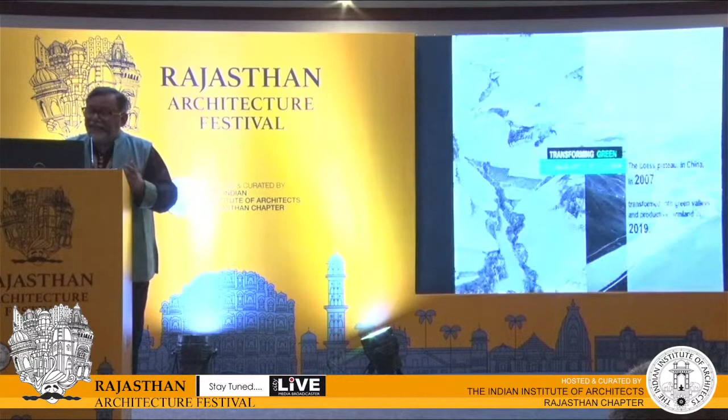This is an example from China, the Loess plateau. The image on the left is from 2007, and the image on the right, with the green and the river, is from 2019. So basically, these are a few attempts that architects are trying to add green, or come up with green architecture or green landscape, with the help of innovation and technology.

But when you talk about deserts, when you talk about the landscape like you have in Rajasthan, we really need to understand the ecology of sand and do the appropriate architecture.

This is again another attempt by architect Jean Nouvel in the National Museum of Qatar, where he tried to be inspired by the desert rose that inspired the formation of this museum.

This is again another inspiration from the sand in Saudi Arabia. X-Architects, a local company, came up with a proposal in 2019 for a resort inspired by the sand dunes and the landscape of the sand.

Again, don't get me wrong, I'm not trying to market these architectures. They are not yet tested if they are the right solution for the desert. All I'm trying to say is that there are many attempts all over the globe using innovation and technology. But what I think is most important is to try to understand again and again the ecology of the sand, and get the lessons from the ancestral wisdom.

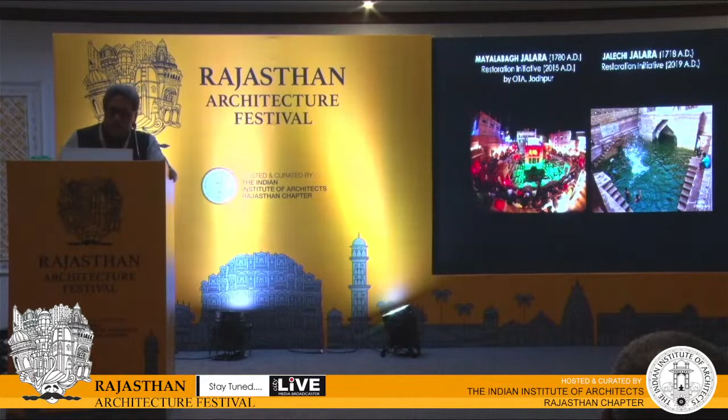Finally, I'll come to this - because just redoing and regenerating these water bodies is not enough, since our cities have grown and population has grown. So what we have to learn is that we have to start that work in progress again.

We have to start adding more and more water bodies in our city, in the colonial colonies, in the new neighborhoods that have come up now. And towards this, one experiment we've done has been very successful.

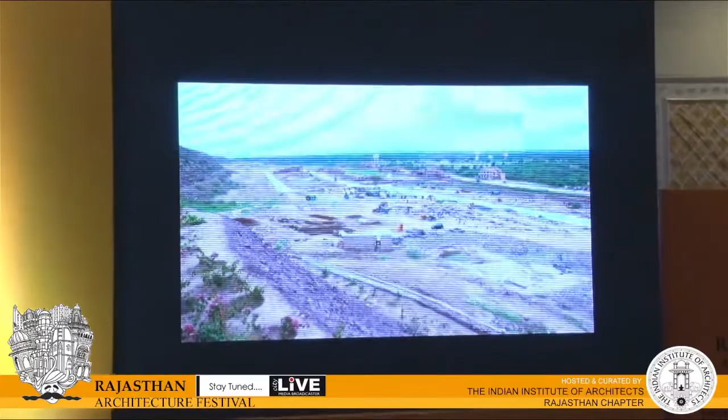This is the picture of the land when we acquired it - absolutely barren, no trees, no water body. In fact, water would come on the other side. There were water bodies nearby, but not over here.

To have a very good township, you definitely needed green. But the state doesn't have enough water to give, and there isn't enough underground water either, because we've touched 300, 400 feet now and that water is too brackish. So we thought we'd resort to ancient wisdom and try to create what our ancestors did.

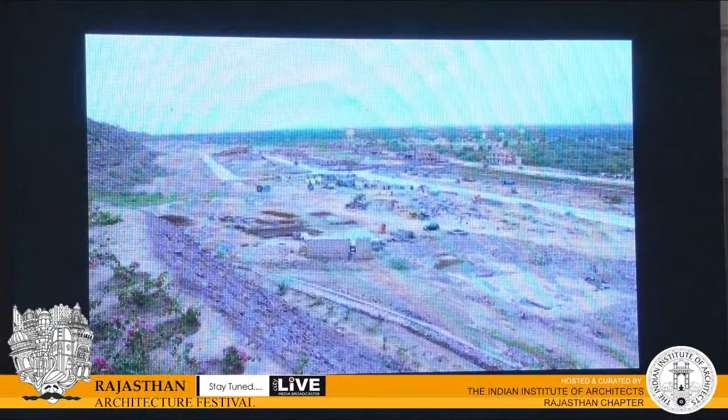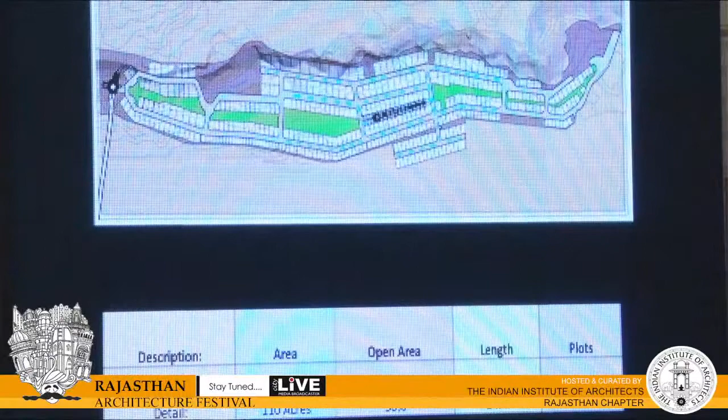So this is what we selected, and we created this. This master plan was done by Mr. U.C. Jain, and we've built this Bawri here. It has a very unique structural system.

We did not use RCC at all, and we did not use steel. We've just used stone. These traditional vaults, we have upended them, keeping two walls against each other to counterbalance their strength and the pressure that earth would apply. The walls are very simple, and the thickness even at the bottommost portion, 60 feet from the ground, is just 0.7 meters. Otherwise, conventional stone walls would be 7 feet wide, like a dam, like a structure.

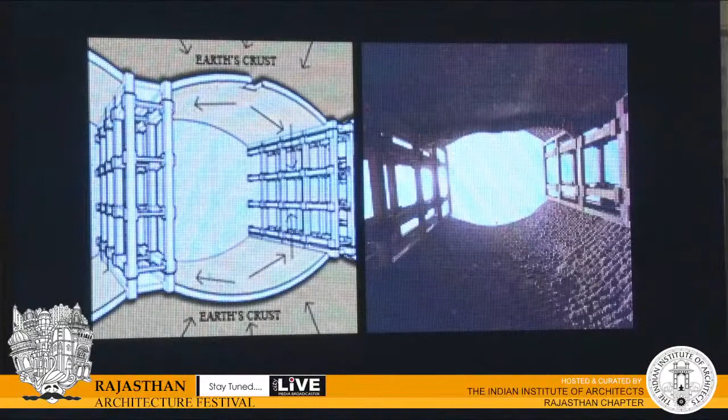The module that we developed, we conjoined about 14 such modules, and this is almost about 235 meters long, going about 18 meters below earth. The water depth would be about 11 meters when at its fullest, and we managed to collect about 17.5 million liters of rainwater in this.

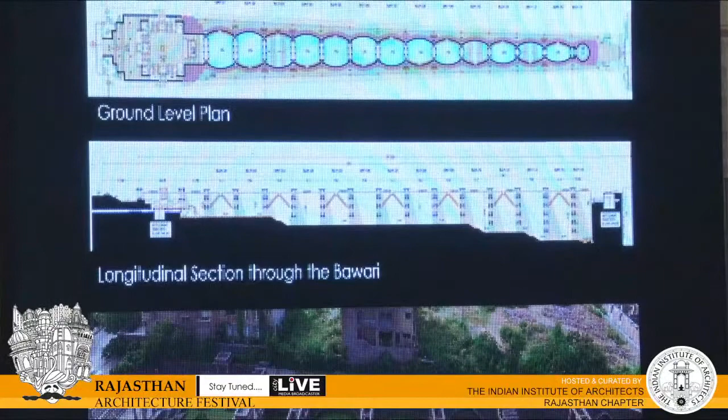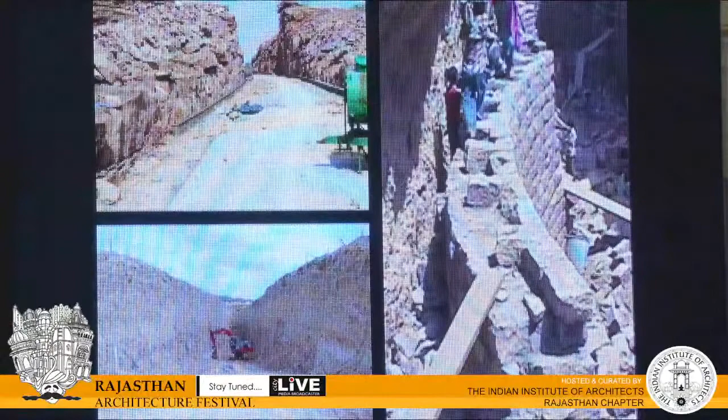In doing this Bawri, what we have used is the overburden of the hillock. When we were doing roads over there, we removed this stone. Throwing the stone out would have cost us, and it would have cost a lot of carbon footprint also. So we used the stone in making these arcuated walls. All the scrap that came out of making the stone, we've used in concrete, infills, backfills and heartings. The excavated earth we have used in filling the land where there were undulations. So we kind of achieved a geological balance.

These are people who are picking up stone. This is a very, very special skill. The skill is dying, these people are becoming extinct because we have a lot of cranes and mechanical ways of lifting stone. But we made sure that somehow we managed to keep the skill alive, and we've used these people, they are called chavaliyas. This is the kind of thing, an entirely subterranean structure that we have.

I'll quickly give you a tour through that. This is a small veranda through which you enter. And this is a combination of a step pond and Bawri. I mean, it's not just a well, it's a combination of two. So this is the kind of grand receiving area.

The two-storied pavilion marks the entrance to the main Bawri, which is about 750 feet long. You take one round and you will have done a quarter of a kilometer. These are the trabeated frames which you would find in old Bawris where you go to Gujarat and in western Rajasthan. And the binocular view that these are offering, you can see there are inlets on the other side, 735 feet, 235 meters at the other end.

And these are the pavilions that you can liken to the pavilions that we have seen in other Bawris, where social interaction would take place. So basically, these are the trabeated frames which are holding the arcuated walls. On top of that, we have created two pavilions where people can go and sit.

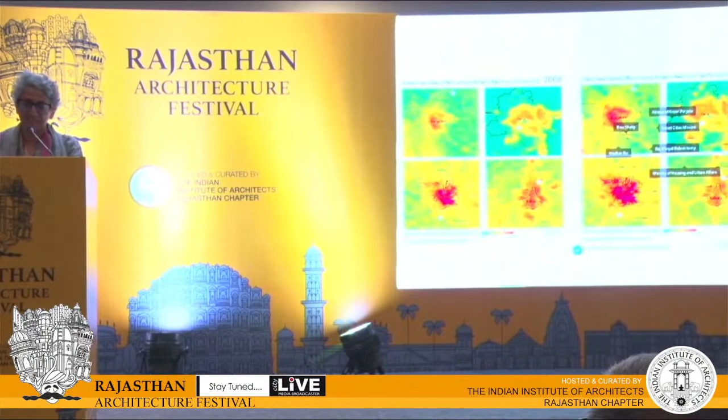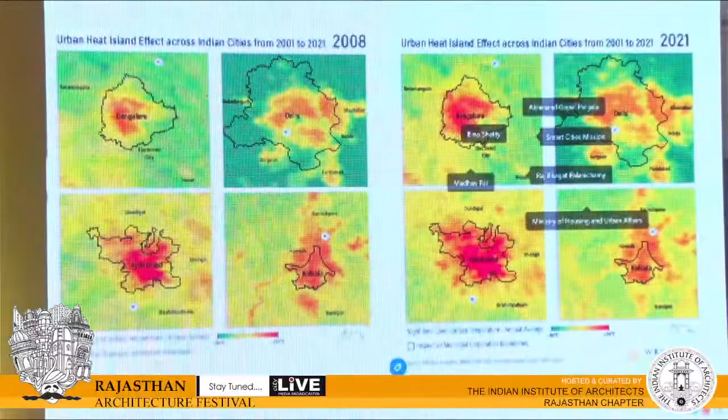This is a screenshot I took of the study by WRI on heat island effect in four cities. So you can see 2008 and what's happening in 2021, including Bangalore, which we say, oh, it's very pleasant, but still, the thing is growing. So, I'm saying, what do we do?

Could we start looking at a new narrative? Could we start looking at something different? Yes, it was a new narrative when they decided to build Jaipur. There was nothing to fall back upon. It's a new narrative. Architect Mridul showed us. It is something more we could do in this era of Anthropocene.

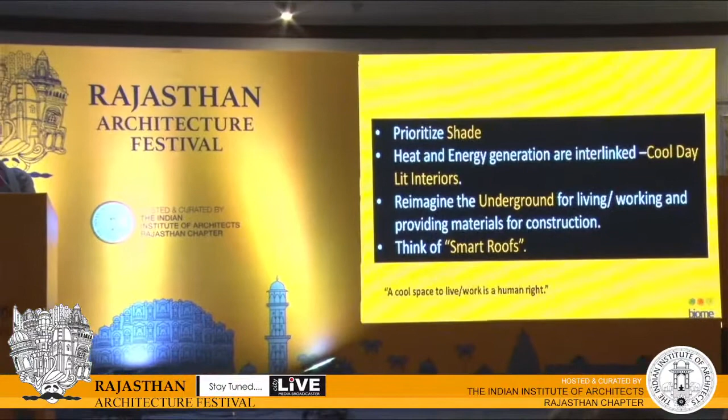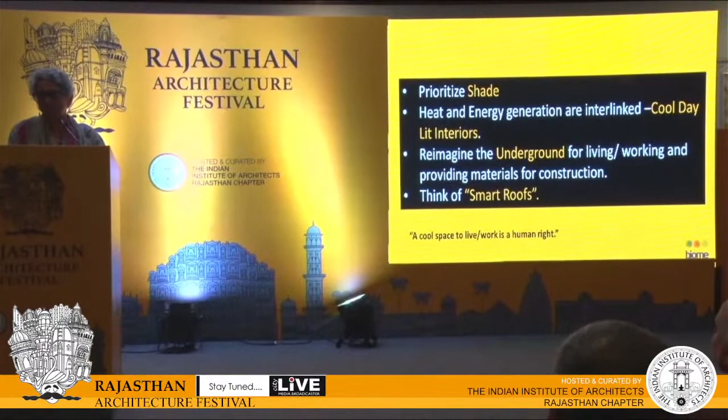And first, we start with the fine print. We demand that we need cool spaces to live and work as a human right. So we prioritize shade. Unfortunately, we don't have time to grow trees, so let's not cut them. But also let's think of building differently and using spaces differently.

So getting back to this, this is a study from Netherlands where they're looking at new towns and how do you design with ecosystem in mind? How do you design with sun in mind? So they design with the sun path. So here studies show how sun can reach to the lowest level at different times of the day, and how do you decide on what height the building should be?

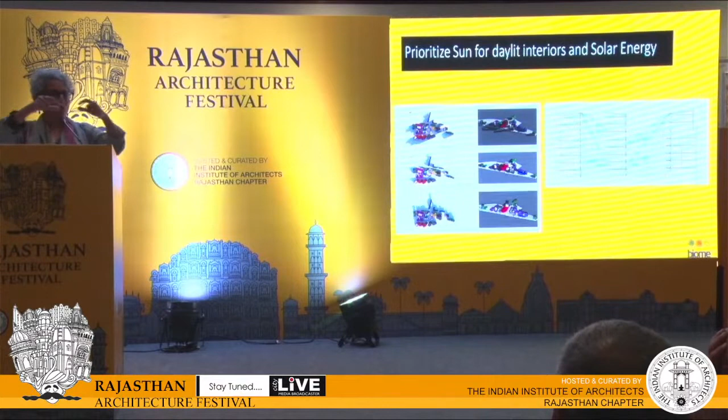Not based on bylaws, not based on width of the road, and then you can decide on what height or what setbacks you leave and what height you do. And then I will put a solar system on my terrace, but my neighbor would put a 20-floor high building and my solar system is totally gone. No, you have to decide this whole thing not only with just one building, but how do buildings talk to each other? And get the daylight inside.

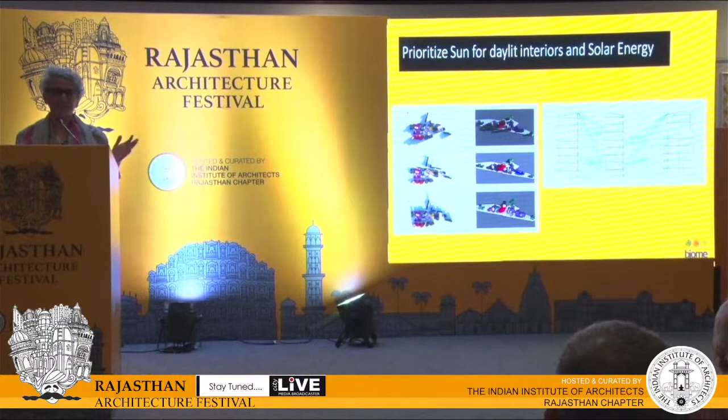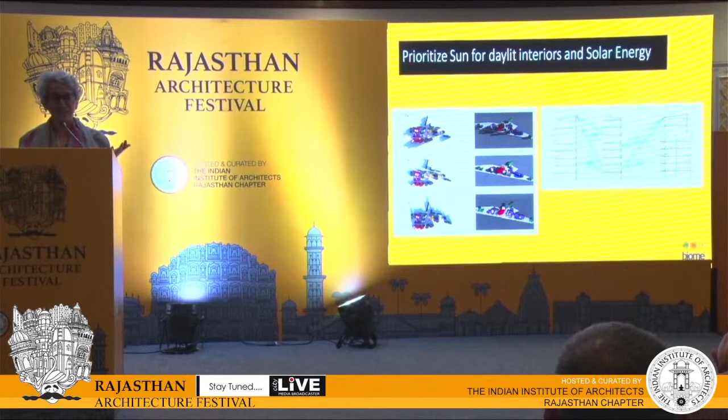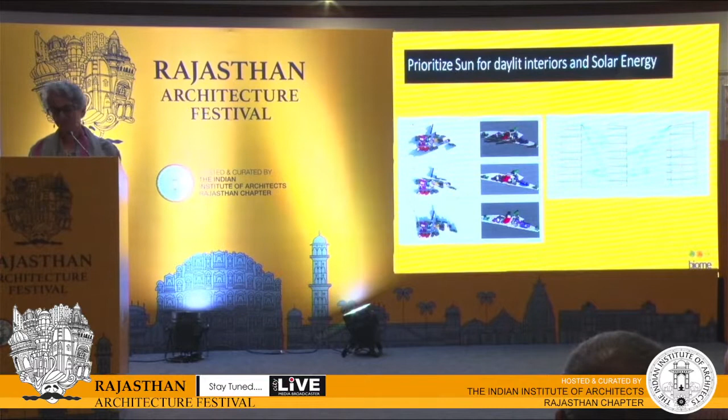We love our old buildings, which just say they're so good, they're great, but we're using for different purposes. If we're using the buildings for offices, for institutions, for classrooms, we need daylight inside. And one of the reasons why we use glass is for that purpose. And so let's not demonize glass, but let's understand how the two can marry. And how do you now decide on various different buildings coming next to you?

So I come with, is it possible to think of the underground? There are lots of buildings which you could do. Yesterday, Chan and I went into a building here in Jaipur, and they had a lovely underground. He said he also had a well, but now it's all dry. There is dirt inside, and it can't be used, but there is an underground.

Helsinki completed a master plan in 2019, covering 214 square kilometers, combining energy conservation, shelter from its long cold winters, and also a bunker in case of Russian aggression. I think they were forthright, no? They really thought ahead.

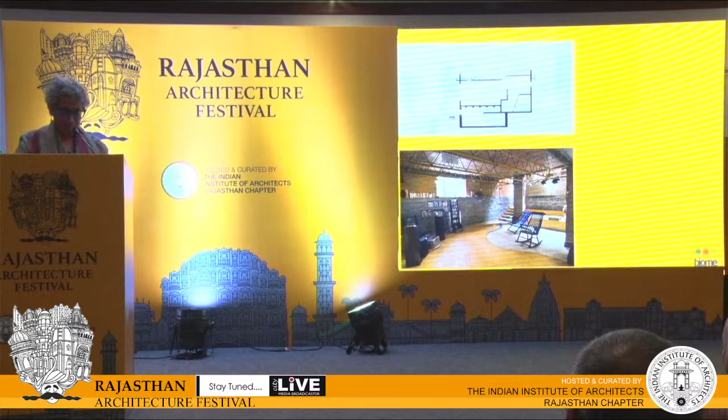And now the basements are becoming better and sexier, so you have skylights. The fact is that we keep getting greedy about making basements, so we have gardens and wells in the basement. But also, why are we greedy? Because we noticed that the earth we remove from one basement is enough to build three more homes.

So Mridul, I was just greatly thrilled that you used the stone and the soil and just reused it, and your phrase of geological, net zero geologically.

So here, this was a house we made with a large basement and a garden and a well, so we got a lot of earth, and luckily it was in the outskirts, so we kept making the blocks just for some rainy day. That meant when we had to do a school later where we couldn't have a basement, and we had to do it very fast, so we made blocks for it and took it there.

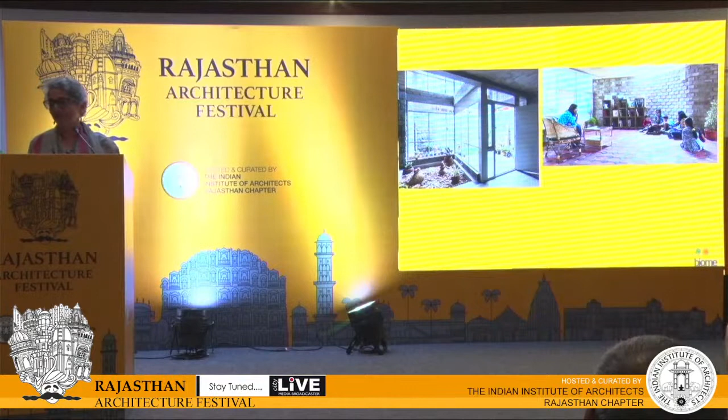And this is the study which tells us, yes, we get three times the amount of soil we would get.

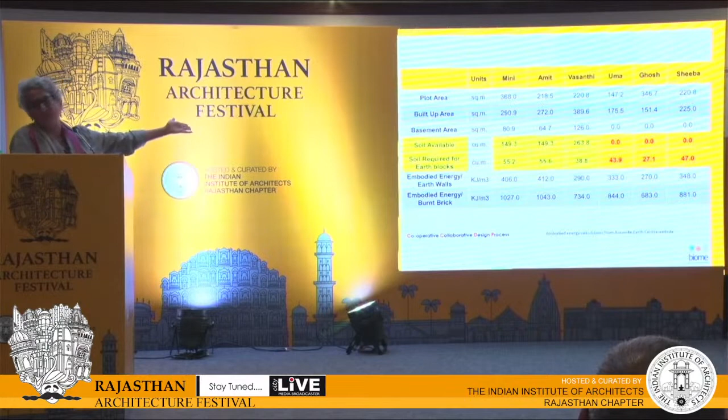Mini has a basement of 150 cubic meters, but uses only 55, and Uma could use that for her house. So what we call is a collaborative, cooperative process, and from that, the city becomes the supplier of your materials. You don't have to go out of the city for that.

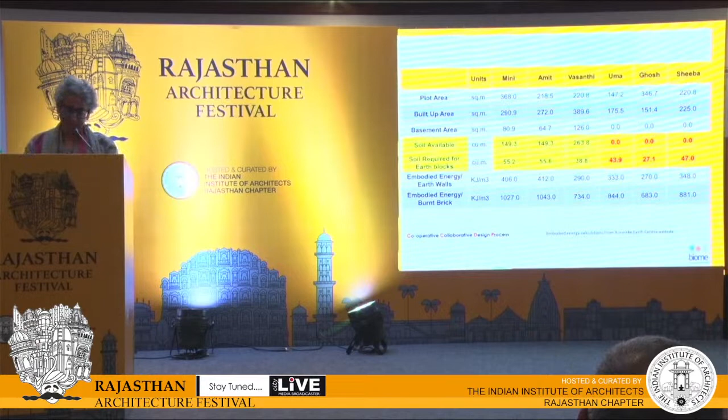Then this I call the mother of all undergrounds. This is a school in Coimbatore in South India, which not only has the classrooms in the basement - though basement is not allowed by bylaws, so you make the play fields also a basement. So now it's not a basement because you can come out.

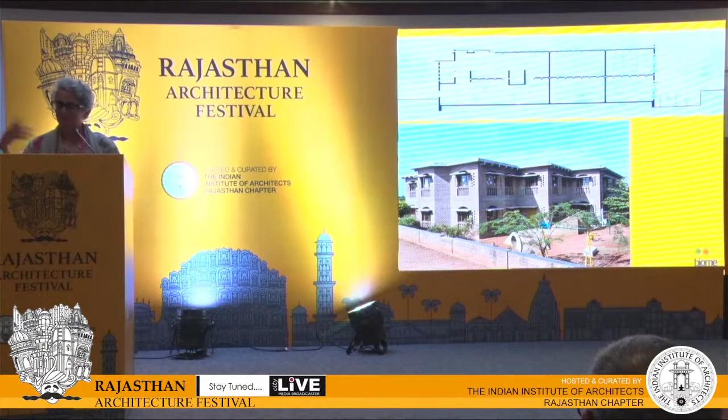Why did that happen? We got a metro station, Shivaji Stadium metro station, a very big place - you have to go there to get your visa. And it dried up this water body. So how do we talk to each other? How do cities not depend on some obsolete bylaws?

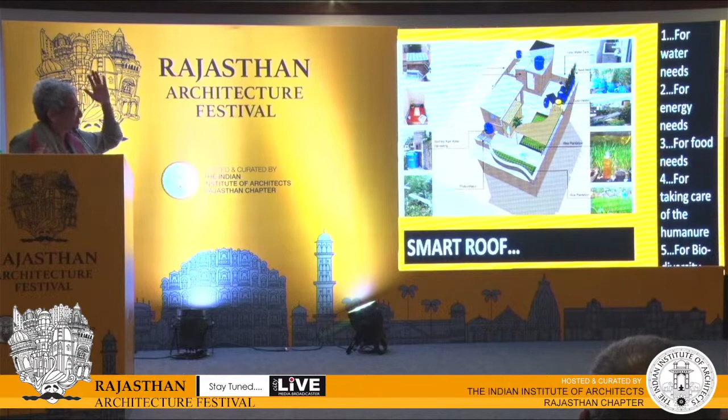So let's change the narrative, and change it in many ways. Think of your terraces as something smart. Think of your terraces which would give you water for drinking and cooking. We have the cleanest water, which would provide for your energy needs.

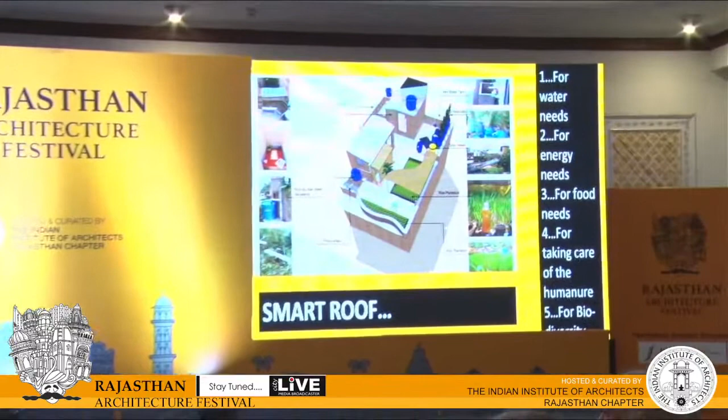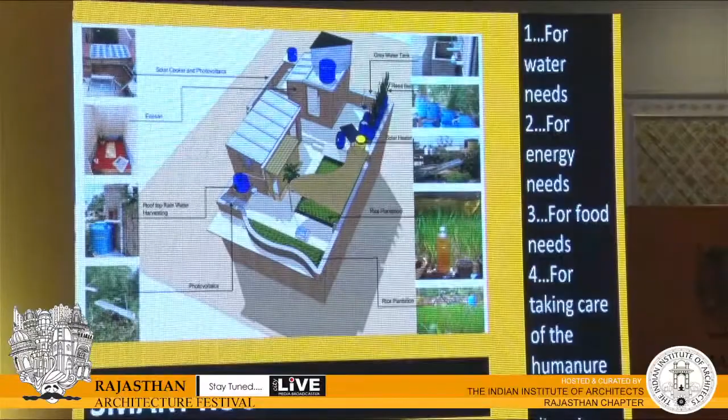And that's why, again, think of the various heights, how you will put it. You can grow food - we grow rice on our terrace and take care of human manure. You're all walking fertilizer factories, all of you. So use that to grow your food, make soil, which is something which is not available.

And with that, we would get to be building with carrying capacity. India says that 400 people in 1 square kilometer is the density required in an urban area. We've done studies, and we say that to get water, energy, food, taking care of human manure and sanitation, and for biodiversity, you need about 40 square meters per person.

This is in Bangalore. Use it for your city separately.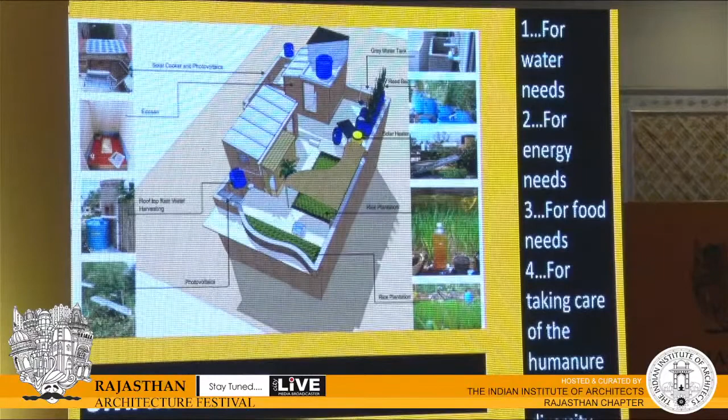I could give a different presentation sometime where I could give you numbers. So you still have 2,460 square meters per person for schools, roads, public spaces, and planting trees. Thank you. More of it, you could see it on our website, and if possible, read the Biome diaries.

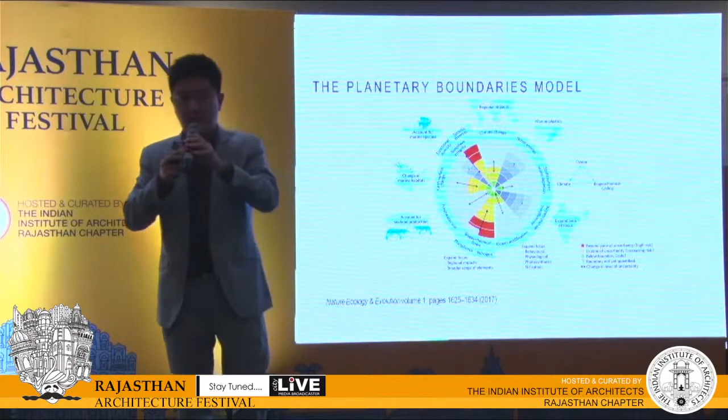Well, the resolution isn't great, to be honest, but if you look up the planetary boundaries model, it's all out there on Google image search. This was done by the good folk at the Stockholm Institute, and it talks about 9 different sectors in which we're facing some risk. So biodiversity is some of them, marine species and so on.

So carbon is just 1 out of 9, to be honest. Of course it's significant, but it's not the only one. So we need to think about how we can live in a just and equitable circle. This inner circle is a social foundation beneath which it is no longer viable to live, because you don't have your regular basic creature comforts. And on the outer ring is an ecological ceiling beyond which it becomes untenable for the planet, because you're stressing it too much.

What we do in the Singapore Institute of Architects, in the Sustainability Committee, is find ways in which architects, and I imagine most of us in this room are architects, have agency in fulfilling the goals of the SDGs, the Sustainable Development Goals. We call them the Environmental Design Guidelines, and there are 7 of them, each with different modes of agency in what we do with building.

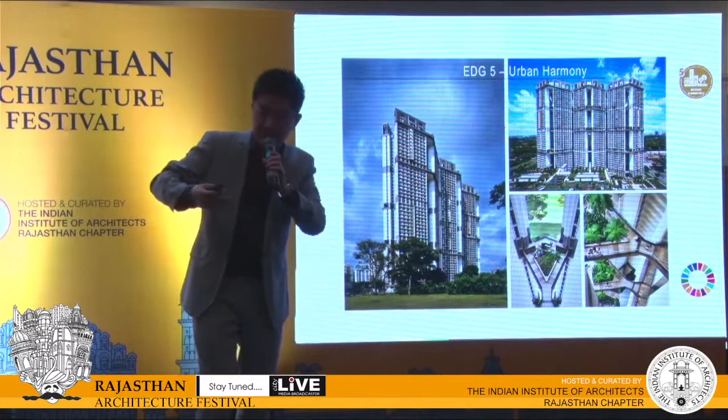I think the stack effect was mentioned in some of the talks yesterday, by the Iranian architect who spoke. Some of these do show up in modern architecture as well.

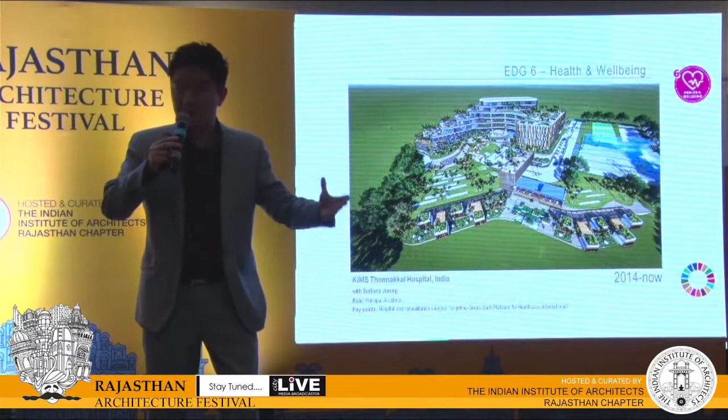Health and well-being, here's a proposal for a hospital in India, coincidentally in Trivandrum. The idea was for each ward to have access to visual greens. The moment you have access to visual greens, if you subscribe to the biophilia mode of thinking, you could psychologically be healed, but at the same time there are environmental benefits that greening allows.

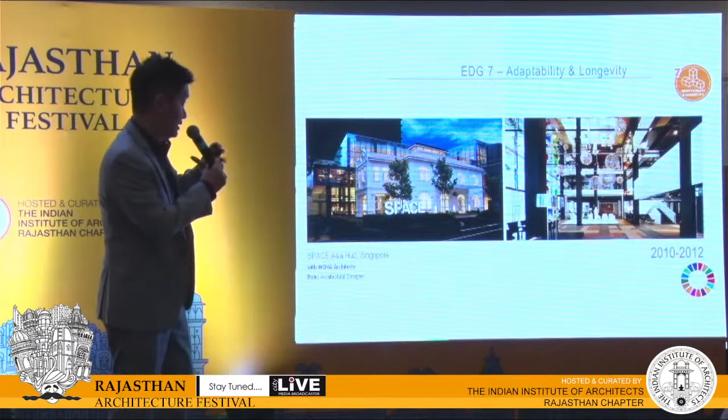Adaptability - left and right, you've got 2 old colonial buildings, not too old compared to India, but old in the Singapore context. In the middle is this new building, made of glass, which bridges both the old and the new, creating a contiguous furniture gallery for a leading furniture brand in Asia Pacific. In the middle you find large volumes connecting these 2 existing structures, so it guts out, but at the same time it connects.

Also, an office building that's built on top of an existing factory or warehousing building.

So that takes it from 10 stories to 12 stories with the exact same structure, therefore saving costs in terms of new construction. And as an amalgamation of these 7 EDGs, I've only shown you 4 earlier, but there are 7.

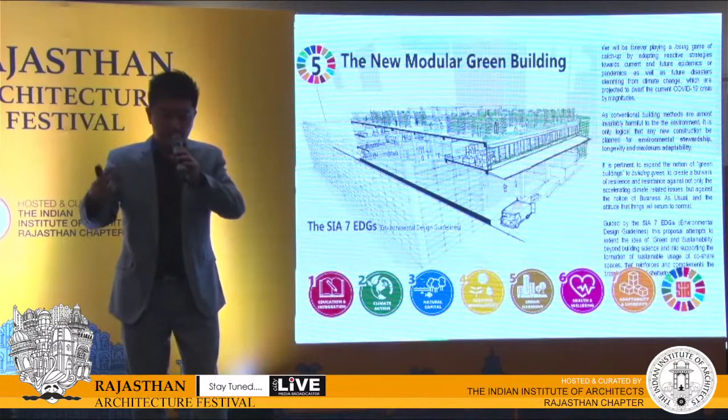During the pandemic, we thought about the possibilities of coming up with a new modular green building typology. We made reference from the old Diwan, the old forum, and the naturally ventilated halls, and adapted that into a new modular building that could be adapted into various things. Food resiliency on top with urban farms, different ward facilities, and access to satellite hospitals.

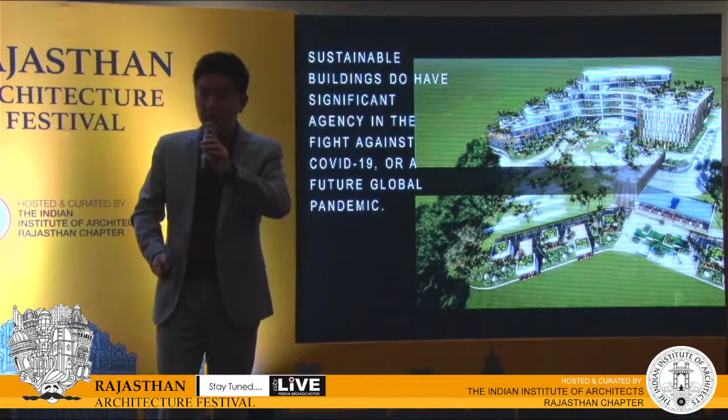So sustainable buildings do have significant agency in the fight against any global pandemic in the future. We do have a lot to go, to be honest.

Architects have an agency not just in design, but in the way you shape people's lives, how they live, who they vote for even. And ultimately, you also have a role in presenting professional thoughts to your government leaders and pushing for sustainable environments. Singapore is 700 square kilometers.

So in its land use and zoning, basically, we've got it down to a T. It's like a giant Sudoku puzzle. Everything has a plot ratio. Every single inch of land, because it's so small, has been planned down to the last square inch.

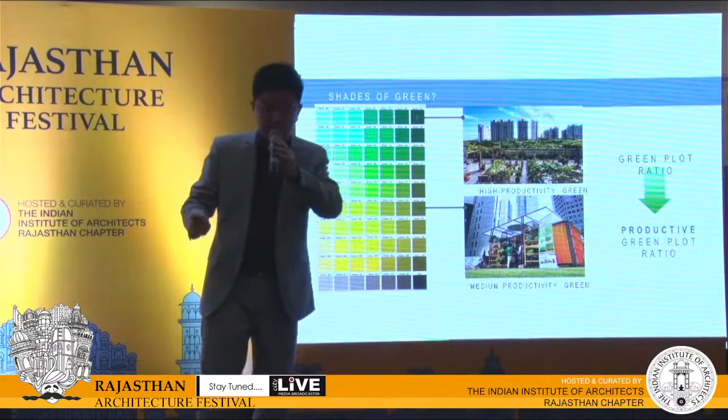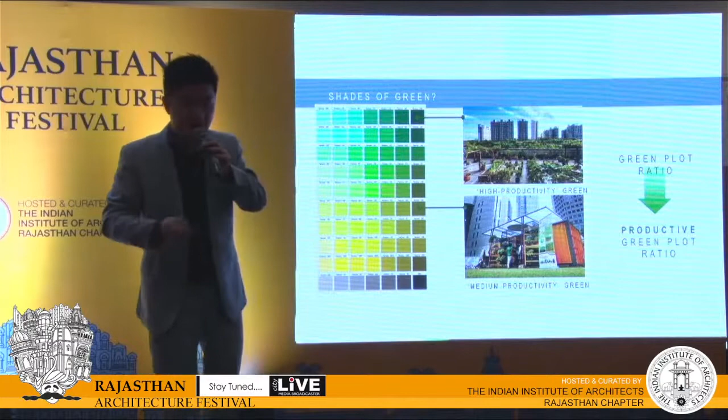To be honest, these are actually Melvin's discussions that we had with the Urban Redevelopment Authority. We talked about different shades, different intensities of green - green that's for leisure, green that's for productive use. You could plant horticulture on it, you could have buildings with integrated green, and that lends you different shades of green and possibly different shades of blue.

Just some examples of how these projects can actually add different shades of green to the grays - parking lots. If we're all moving away from cars, moving towards public transport, this is what we could do.

This is not in Singapore, it's actually in Thailand. I've got a colleague from Thailand here as well, Acha. This is an amazing project of how both green and blue can be added into urban infrastructure. It's a university campus, I think it's Thammasat University.

Anyone been to Singapore? Do you recognize this thing?

See, water crisis - it's no longer spewing any water from its mouth. Not only is it not spewing any water, the sea levels are rising. In 2022, if there are any flash floods, this is about as much as we can cope. By 2100, by the time your kids or grandkids visit Singapore, this thing will be swimming - although I don't know how it swims because it's got no fins. But it is true, globally, we do have a rising seawater levels crisis, and how are we actually going to face that?

Some aspects of urban resilience - you mentioned underground earlier, Chitra. So this is in Tokyo, and this is a little displacement tank for flash floods. What we try to do is we try to turn concrete - by we, I mean Singapore.

I didn't work on this project, but it's a very popular public project by Ramboll Studio Dreiseitl, a landscaping company. This used to be a canal, and this is the new park it's become. When it's dry, this is what it looks like; when it's wet, it becomes a flooded embankment of water. That's one way of dealing with the green and the blue.

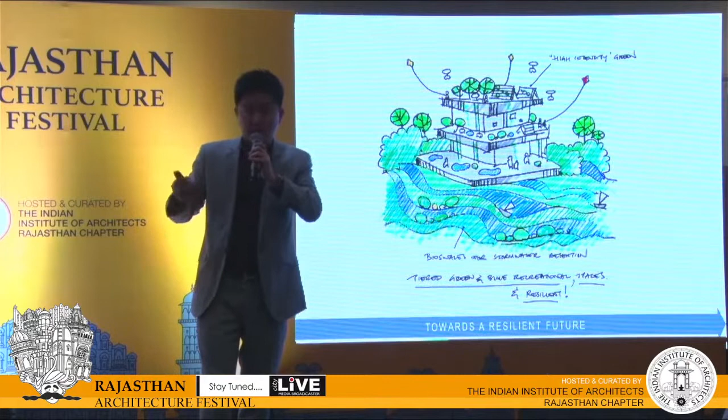Some ways around that would be to make it more intelligent, using blockchain, different technologies, AI. But fundamentally, I think we need to go back to the fundamentals of architecture. What is a nice space, as our colleagues have shown us this morning and in the past two days? What is vernacular wisdom that we can actually use? What is blue, what is green, what is gray? So as we progress, let us not forget what made us, and I want to close off with a big thank you.

There are amazing examples over the past two days that I didn't manage to fit into the slides. We've visited Hawa Mahal, and we've also visited the baori at Nahargarh Fort earlier this morning. Really, some of the examples we tried to design have been done so many thousands of years ago by our ancestors. So let's go back to what made us who we are. Thank you very much.

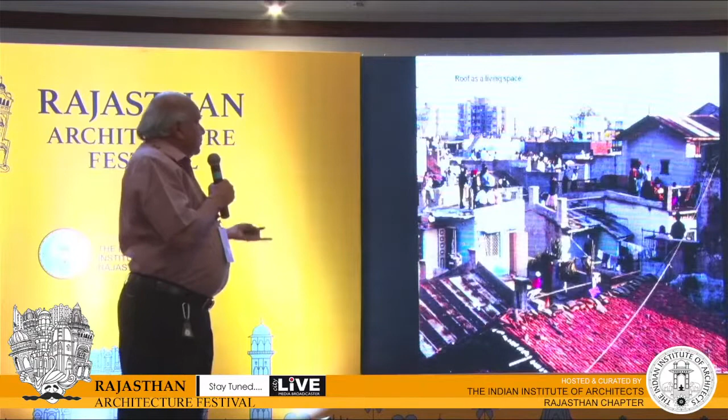But with insulation, what we've forgotten is ventilation. When we just close the window, it's not the same. We used to live outdoors, so again, outdoor as a living room, with terraces etc. Three-part window - light, view, and ventilation - is the role of fenestration, and like a thali, we could permute and combine. So control was with us, not like a hotel with fixed glass in Bangalore where outside is 24, yet you still need to run an AC to get inside 24.

Skylight in India, we need Ray-Ban. We have high sky component and glare, we need to diffuse light. What gave us liberty to have hotel corridors with doubly loaded blank walls - even in daylight you have to use artificial light and ventilation.

We had a fantastic solution in jalis, which respected one-way privacy - you could see inside out but not outside in. I always say, Padmavati knew how Khilji looked, but Khilji died without knowing what Padmavati looked like.

The Venturi effect, Laurie Baker also used in contemporary architecture. Courtyard, the DNA of our architecture, right from prehistoric or early civilization till today. Water harvesting in a decentralized way, we saw a nice example.

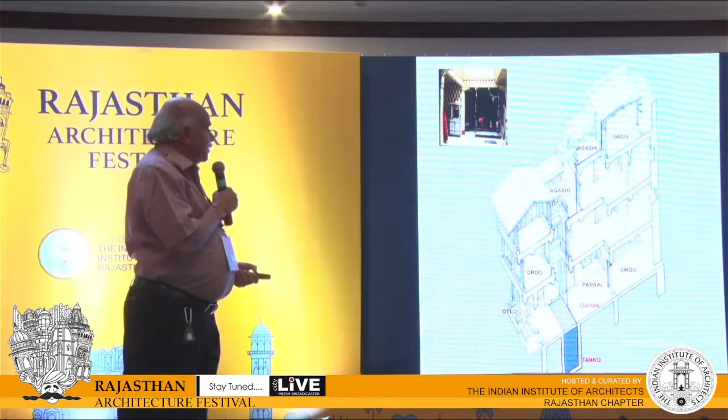So with all that, I'm running through all those R's that we could be using for this approach. And in the default, I'm changing the scales of intervention, again taking the positive note that we can make a difference.

So first, refuse - that should be the first. If we don't need an air conditioner, let's not use it. If we don't need daylight in the afternoon substituted with artificial light, let's not do it.

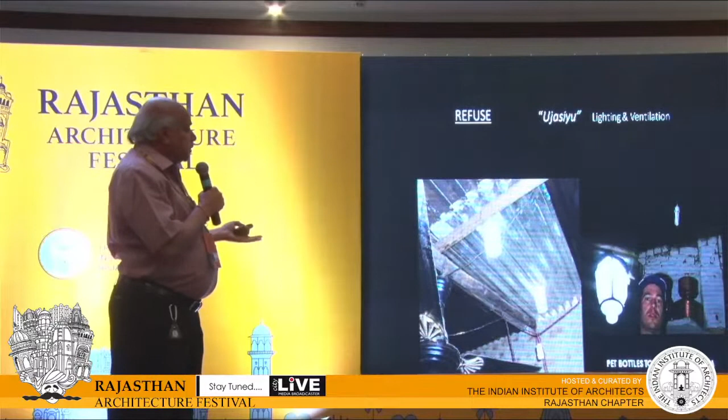This is the first, smallest installation-like intervention in the middle of one of the largest slums in Ahmedabad, for an NGO. These are people-built houses, so three sides are shared with a neighbor, and it's a deep, long house. Unlike the courtyard, it doesn't have any courtyard, so the last few rooms are invariably pitch dark and, with a tin roof, extremely hot.

All we did was use this PET bottle. This was way before the MIT and the Philippines experience, but that would not give ventilation - it did work for lighting. That 5 paisa bottle, nobody even gives 5 paisa for a throwaway bottle.

But then we made, with local help, dormer windows with a translucent kind of roof, which you could simply put over a corrugated sheet. This has been installed in several hundred homes, first in Ahmedabad and then in Bhopal. These are daylight pictures, and there's been one year of this recorded.

What does it do to the people is essentially what we're looking at - how can it improve the quality of life? There has been a recorded minimum of 250 to 300 rupees saving per month in electricity bill, and a minimum of 1,500 rupee increase in their home-based domestic economic activity. Of course, the health level and education level is another thing.

In fact, in terms of social status, they said about their daughters - we called it 'ujasiyu' - like toilets, they say 'ujasiyu ke wahan behayenge'.

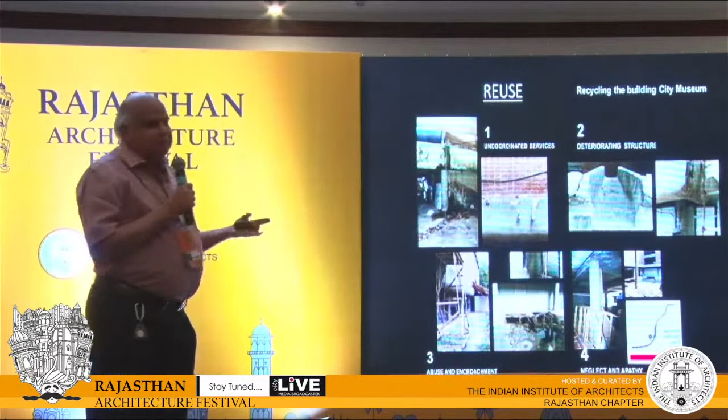Then reuse - we have many buildings, and Jaipur is a classic example. Even Corbusier's building has become history to us, and this was the dilapidated state it was in. We restored it, put it to sympathetic purpose, and it's now a city museum, arguably the first and only museum of the city.

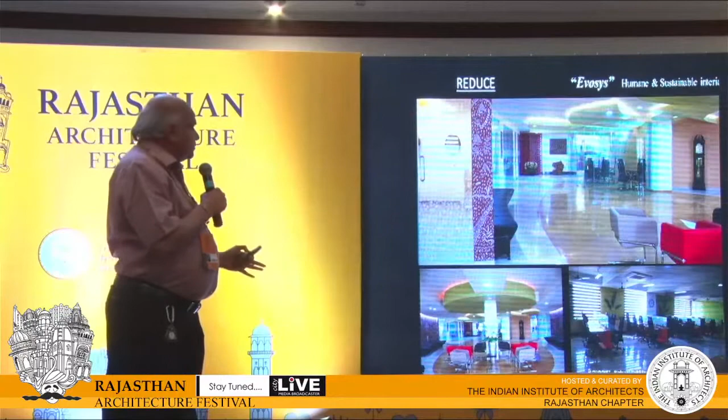Then reduce, what I needed to - this is a commercial building, now coming to interior, where we don't have much control. This is an IT interior with multinational presence, and yet a simple common sense principle - we had to diffuse the light, make an open plan, make everybody take advantage of natural light and ventilation. When weather is favorable, why go to AC?

Their own recording shows 50% saving in this installation. Redefine what we pick up - this is a residence building for a wealthier family, and yet I think Antilia needed these principles the most. So it's not about poor architecture, it's just a principle that we can put in anything.

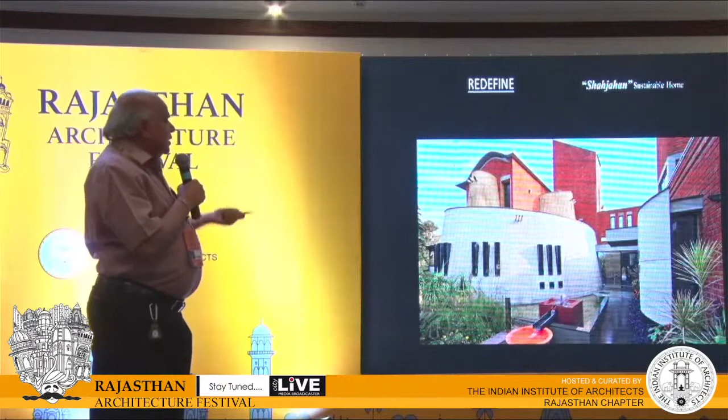So it's a least maintenance or no maintenance construction - local brick etc., cavity wall construction, water harvesting and recycling. There is water and vegetation for microclimate, natural palette of material.

The client came and said, at 70, I want central air conditioning and the kind of new built material. It ended up as selective or no air conditioning and Kota stone, a new interpretation of the courtyard. The main formal drawing room ventilates out of this courtyard system.

There's no chimney in Indian cooking, it's a myth. This is a skylight which escapes the smell, the heat, and gives you good natural light all through the day. As the sun moves, there's a ferrocement roof with a slit.

And as the sun moves, you have this art and craft of the place we like to incorporate in all the projects as far as possible, to give them patronage and also no denial to the technology.

Respond is a standalone commercial building, and if you see the facade, it corresponds to the orientation of the building that it sits in, from a kind of northeastern direction.

And the southwesterly side has an operable louver. And this is a jali. We've emulated the kind of monuments of Ahmedabad to give it an identity.

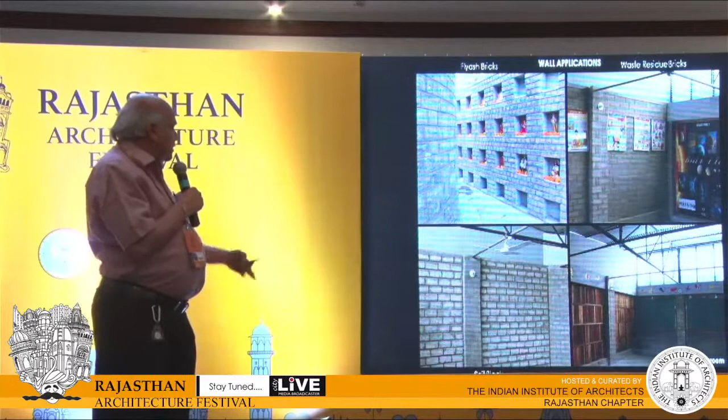This is in a slum where women in particular are the breadwinners and they are the rag pickers. So there are different examples of recycled waste which was otherwise not effectively used, from a fly ash brick to waste residue from a dump fill site made into a soil block with a little binder, and even crate wood which becomes a partition.

This is the widows from the settlement in the evening cool hours in their own compound, singing bhajans, just with thumb pressure filling in the plastic bottle, which now becomes the equivalent of a 2.5 rupee brick. They earn a few meals of employment out of that.

Similarly, Ahmedabad is a dry city, but there are enough liquor bottles to be found. This is a west facing wall, so that no amount of overhang would have cut down that kind of glare. This really diffuses the light and is a little cheerful for the kids to play there.

Similarly, the inert material is used as a filler slab. Even digital waste here is used as an experiment or as a demonstration. All your rag as well as some of these packaging materials...

Packaging material which is neither paper nor plastic gets recycled as a paneling material. The scrap from the metal, which becomes, in this case, whatever we got is how spontaneously it was done. It was not premeditated design, but it's an interactive floor with the cycle part.

Even the digital waste is put here as a door paneling. So it saves on pollution, and with value addition, it even gives employment, and hopefully it performs. We have done all test results for all the material, so they are not underperforming. In fact, they're cheaper and better, and it was within the economic framework compared to what other alternative material might have come about.

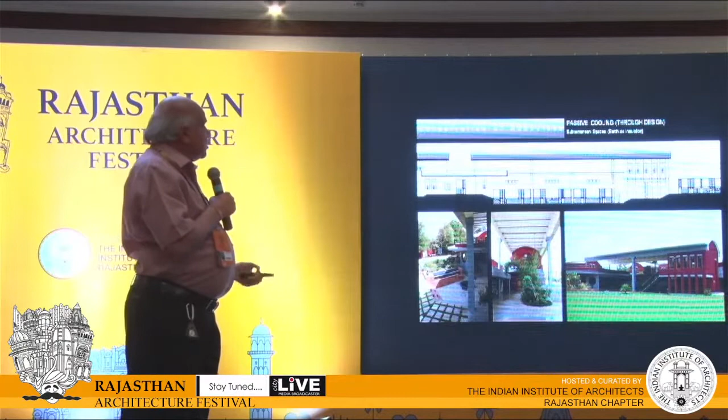That soil is used to pack onto the rest of the site, to raise the ground from the road which came later - that became earth berming. Then this typical outwardly projected profile which we see in Rajasthan and Gujarat.

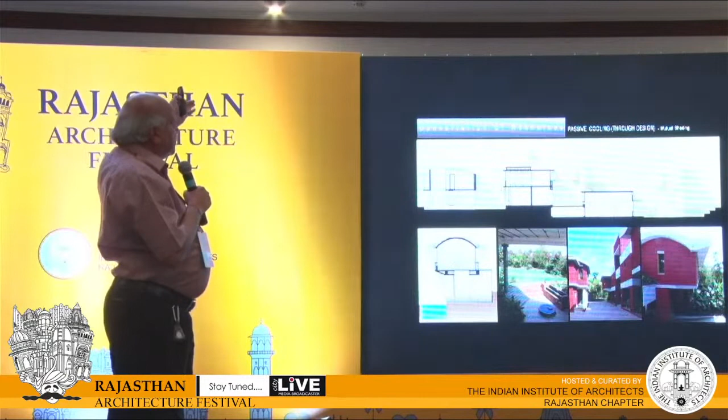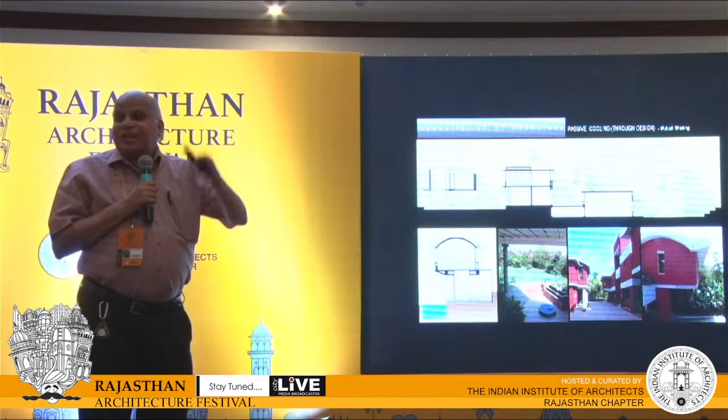So when the sun is overhead, that entire facade is in the shade. One quick study done by a student in Rajasthan found that even 2 inches of cornice shelters the facade for more than 25 minutes or so. So that overhang was a big factor.

Cavity wall, ventilated cavity, outdoor use of the space, so you don't have to overbuild. You could use this at different times of the day. And of course, vegetation and recycling, 22 lakh liters harvested, and a lot of waste recycled.

Coming to the settlement, literally greening the desert. This was the outcome post-earthquake. This was a kind of lifestyle. They lived in a very harsh climate, still endured and created a beautiful environment.

We did this first, the simulation of what we felt was a village-like setup. People kind of reacted to that, and they said, are you an architect?

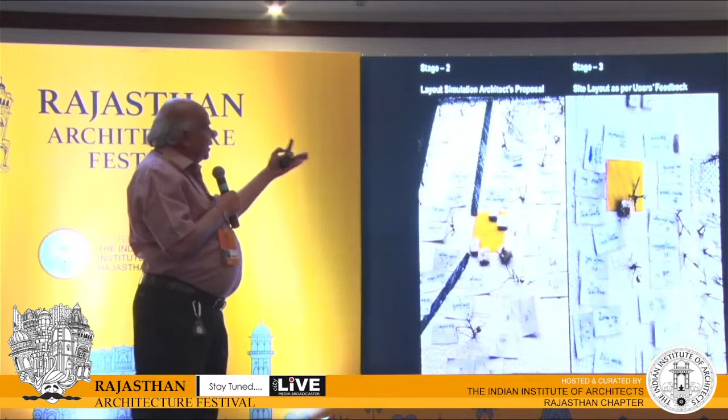We allowed them to play a game with their name on a scale plot to place accordingly. They did some organization, then we came in asking, how about open space? They said, okay, you seem like an architect, we'll accept it.

Then that was taken to the site with the model, so they understood the orientation, they understood the kind of alignment, etc. That would not give the idea of scale otherwise.

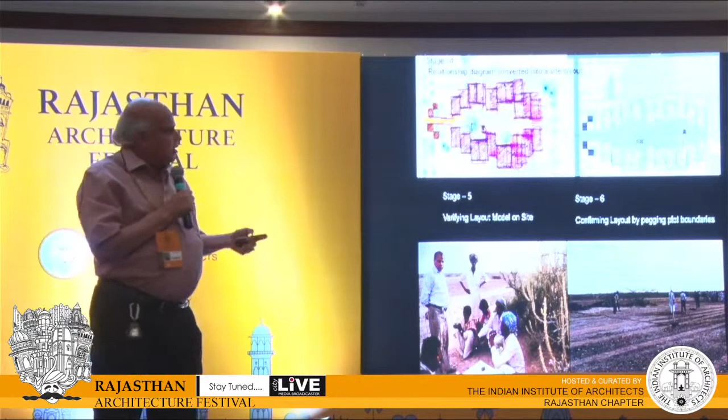So then we had pegged one plot with all of them, who said, you come from Ahmedabad but you're not that stingy, this will work for us. And then with the local soil, they were the experts in knowing how much to balance in terms of fibers or plasticizers, etc.

10 youth produced 3,000 blocks, earning employment, 300 each for their own house. They were building their own house, so they would do the best they can.

The youngest of the family learned from the oldest, so this traditional know-how is passed on. Like this, maybe a 12-year-old knows how to do this complicated roof, and then they dolled it up.

This was 75 rupees a square feet when the government stipulated cost was 350 rupees a square feet, and this was done, ready in 2.5 months' time, including celebrating some young person's marriage in between.

And this is not just decor, this is a scientific way that in a hot, dry climate, when you have vagaries from outside, we want a small window. That's wisdom. And a small window should not be gloomy. So you have white clay and reflective mirrors, so it's dazzling.

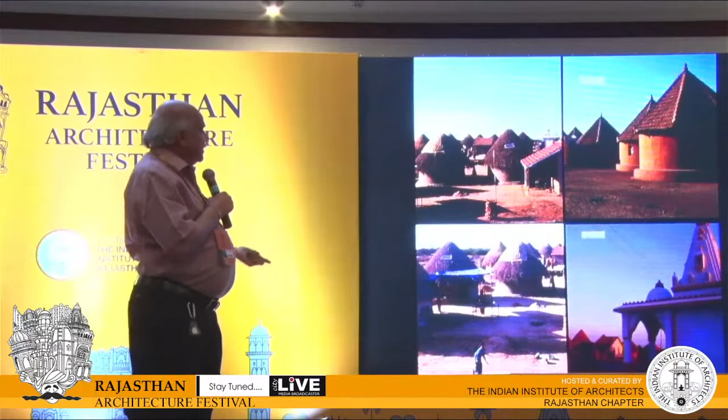Then, of course, these amenities were put in, smokeless chula, so there's no denial to present-day knowledge. So smokeless stove, solar panel, all that was introduced.

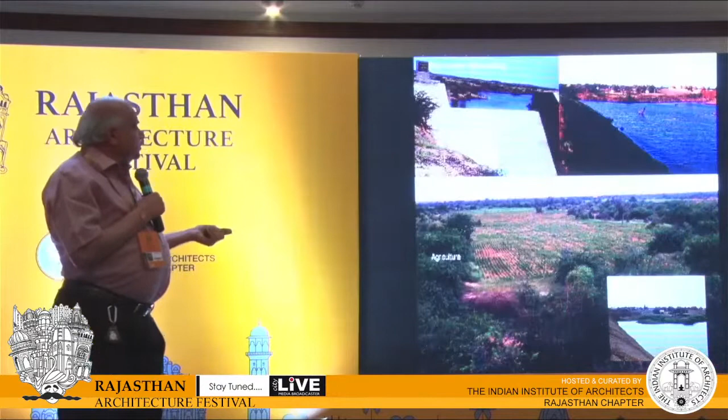And from where we dug up the soil, consciously dredged, it actually became a reservoir with only 3 inches of rainfall in the middle of the desert where there's nothing. And with water coming there on their own initiative, they started agriculture. So the whole ecology of the place changed.

And that's where the culture flourishes. This also won us the United Nations citation. They asked us to revisit this after 10 years. So some of these are recent slides, and so what lessons did we learn.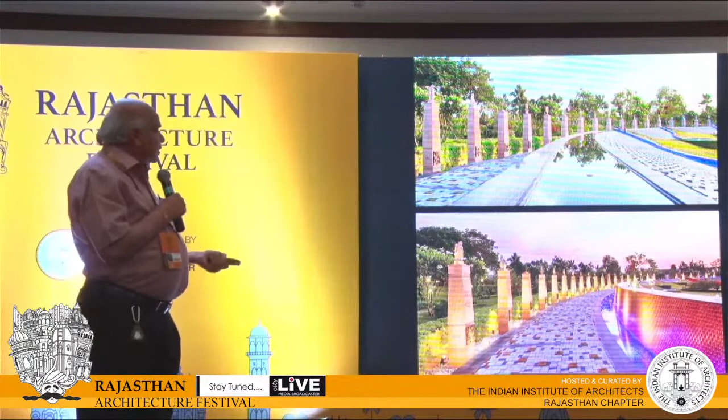So glamour and beauty both catch our attention, but glamour is applique and temporal. Like fashion, it fades away, while beauty is integral and timeless. And if we pursue that, I think we can empower through design, as I showed at different scales.

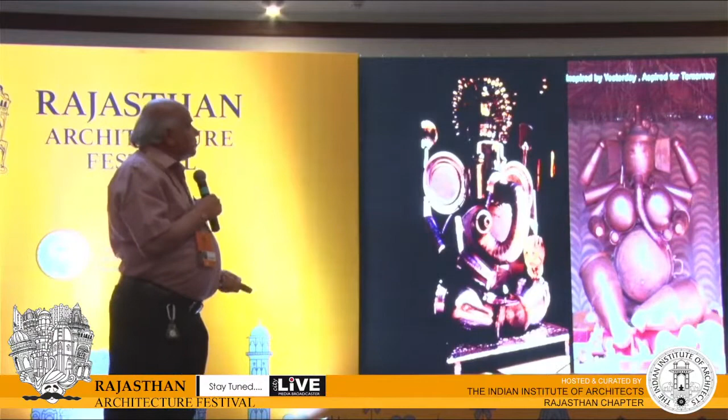But the goal has to be that we improve the quality of life through our endeavors. And to do that, rather than giving Gandhian value in terms of currency, we might have to make Gandhian value itself the currency. I think we have a huge repository of wisdom from our backyard. So if a mantra can be inspired by yesterday and aspired for tomorrow, I'm sure we can make a difference.

Thank you so much for your patient listening.